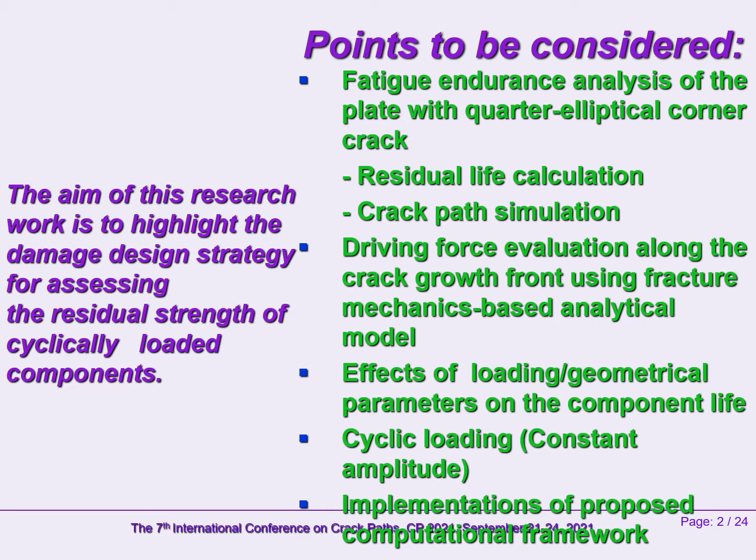The detrimental effects of microconcentrators caused by stress gradient in zones with initial flaws can be avoided during service operations if such safety-relevant mechanism is explored through suitable fracture mechanics concepts. Thus, the fatigue degradation analysis should be performed in terms of crack growth rate as a function of the stress intensity factor. The propagation of part-through corner crack is herein tackled through crack growth rates in depth and surface directions using two different fracture mechanics models.

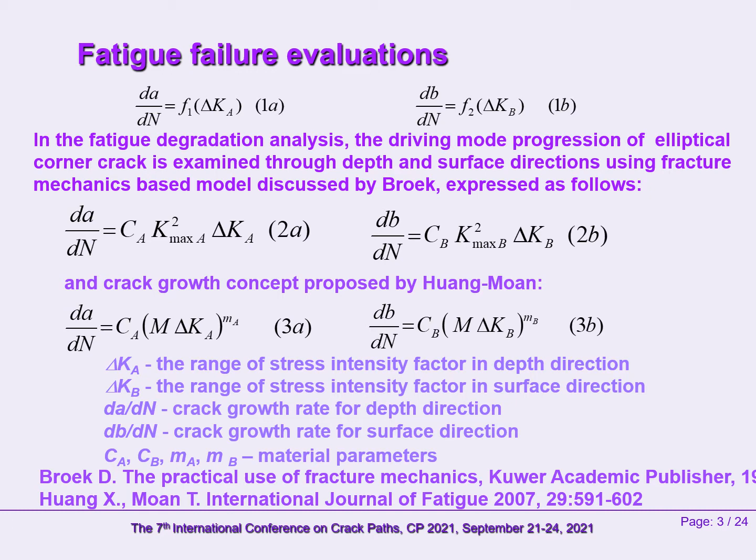The first is expressed by equations 2a and 2b, and the other given by equations 3a and 3b, where delta Ka and delta Kb are stress intensity factors in depth and surface directions. dA/dN and dB/dN are the crack growth rates for the two critical directions. Ca, Cb, mA, and mB are material parameters experimentally obtained.

Through the fatigue endurance design, the number of loading cycles to failure is evaluated by integrating the crack growth rate for relevant initial A0, B0 and final AF, BF crack lengths in depth and surface directions. In this context, the number of loading cycles expressed by equations 4a and 4b is obtained using equations 2a and 2b, whereas equations 5a and 5b are obtained after integrating equations 3a and 3b.

Bearing capacity of structural components with damage may often be threatened due to a complex interaction between surface loadings and environment. Such an effect is evaluated through fracture mechanics parameter M given by equation 6, which was involved in the Huang-Moan concept.

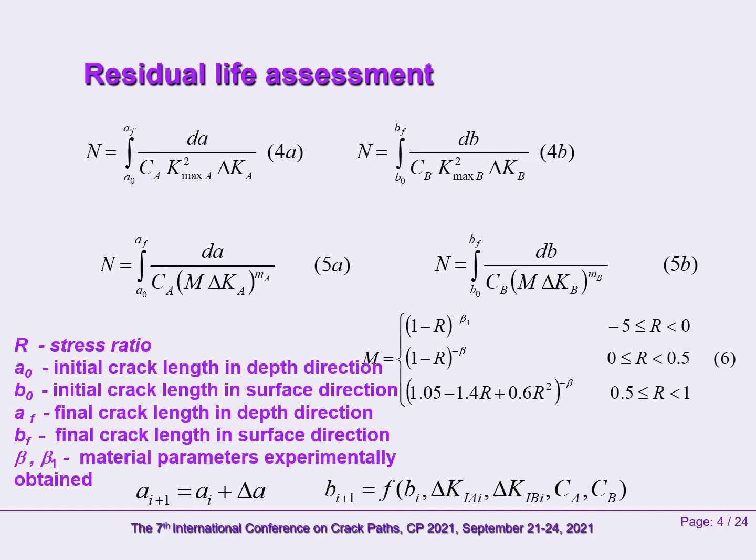A complex singular stress state field is responsible for the occurrence of fracture due to accumulation of damage in the vicinity of the crack tip. From a fracture mechanics point of view, such a driving mode zone should be considered either in terms of stresses or displacements, expressed by equations 1a to 1c and equations 2a and 2b, where stresses and displacements are tackled as relevant functions of the stress intensity factor.

The quantification of disturbed stress field in safety critical zones in terms of system durability requires tackling the effects of stress raisers associated with service loadings via the stress intensity factor using analytical and/or numerical fracture mechanics models. In general, the stress intensity factor in the case of elliptical crack can be evaluated for depth and surface directions using equations 7 and 8, where delta S is the applied stress range, A represents crack length, and FCOR-A and FCOR-B are relevant corrective functions related to the shape of the elliptical crack.

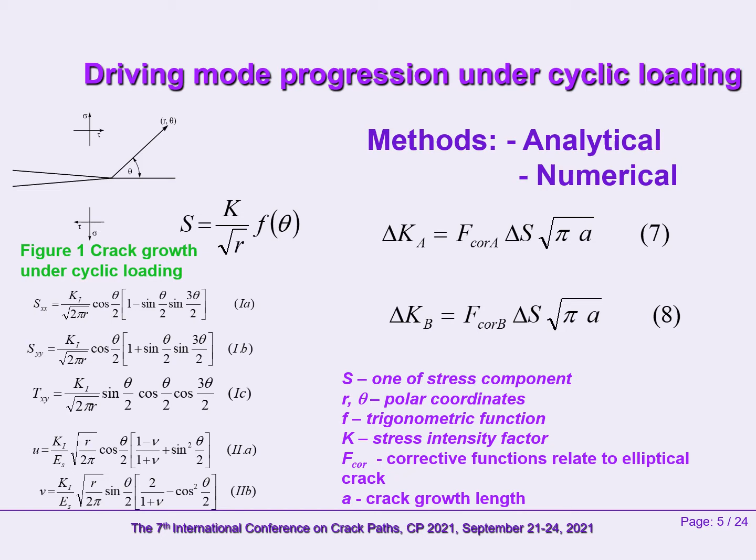According to fracture mechanics, the fatigue behavior of quarter-elliptical corner crack is explored employing equation 9, where delta S and A are applied stress range and crack length, delta K is the stress intensity range, and Q represents the ellipse shape factor. Crack shape variations under cyclic loading are theoretically analyzed using the corrective factor FQEC.

Expressed by equation 10, failure mode due to quarter-elliptical crack is evaluated combining the effects of crack size, crack shape, front face, and thickness of the plate through relevant corrective factors M1, M2, M3, g1, g2, f phi, and fw, shown after equation 10.

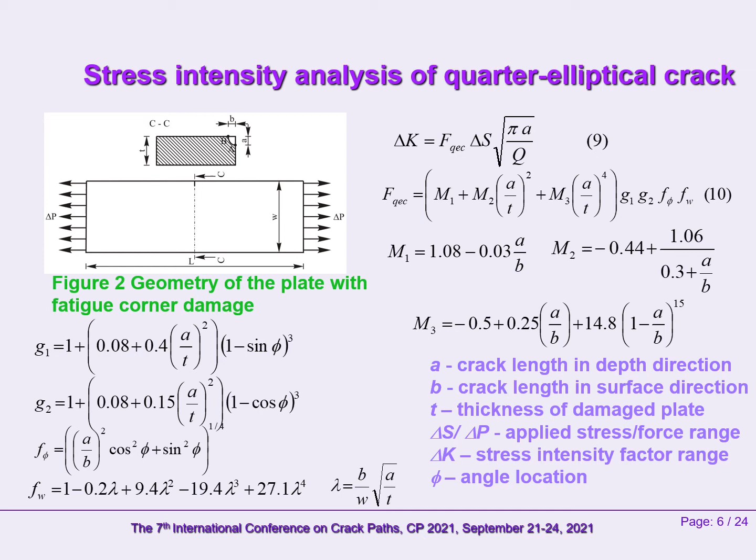The fracture mechanics-based computational framework generated within this research work is presented in figure 3. For the failure evaluations of plate type configurations, geometrical and loading parameters associated with material properties are used to explore the stress intensities along the crack front under cyclic loading.

Then, by employing two-parameter driving force concepts, the crack growth rate is generated. Further, the residual strength was assessed in terms of number of loading cycles. Moreover, driving mode progression was analyzed through crack path evaluations.

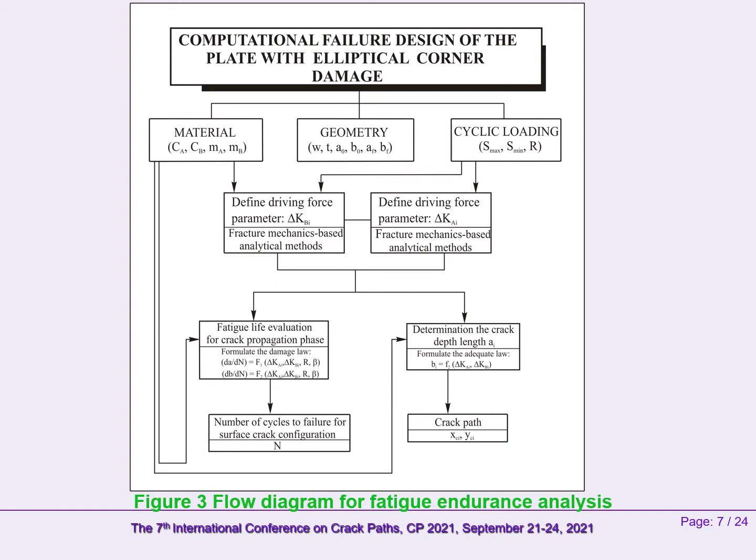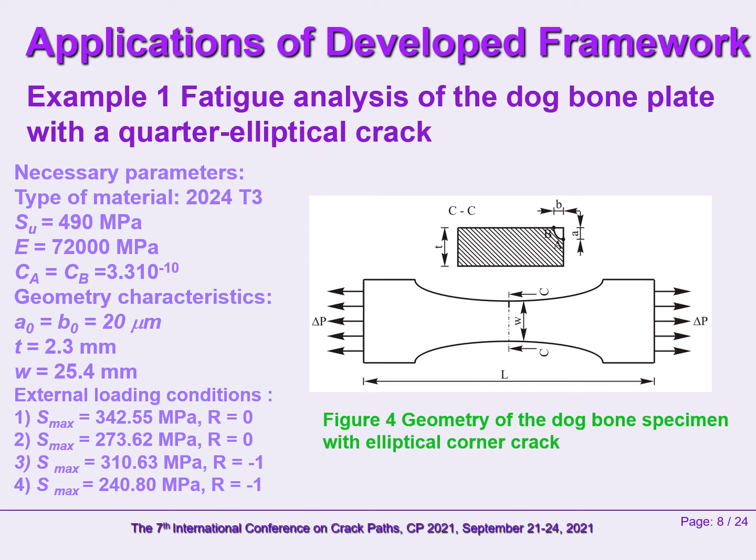Fatigue-induced plate failure is assessed combining equations 4a and 4b with the set of relationships for the stress intensity factors, equations 9 and 10, associated with relevant parameters M1, M2, M3, G1, G2, Fp. Since the residual life for the same configuration was previously evaluated by the present authors in reference 2 through the crack growth concept given by equations 3a and 3b, these are also involved.

Now, in the case of maximum stress equal to 273 megapascals and R equal to 0, the evaluated number of loading cycles as a function of crack length in depth and surface directions are shown in table 1 and figures 6a, 6c and 6b, 6d, where estimates in figures 6a and 6b are from reference 2, and those plotted in figures 6c and 6d are the present results.

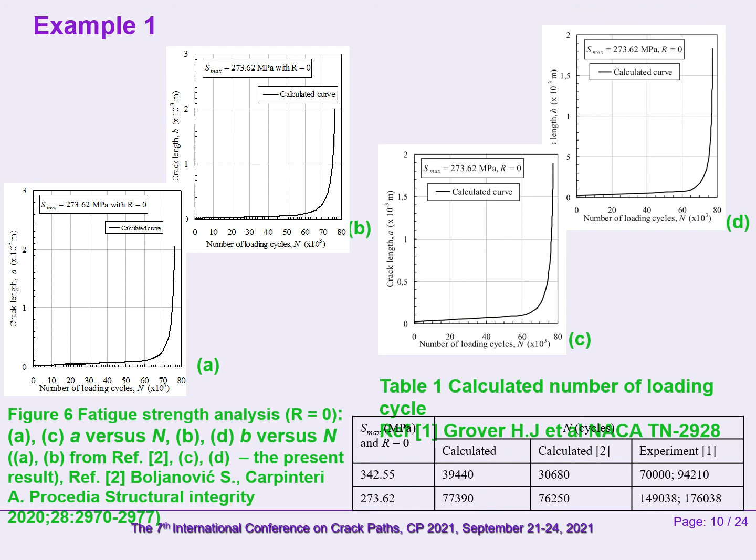From the comparison shown in table 1, it can be concluded that fatigue estimates obtained through the computational framework developed in reference 2 are more conservative with respect to experimental data from reference 1 than those generated through the framework proposed in the present research, in the case of stress ratio equal to 0.

Through damage tolerance-based analysis, the residual life was assessed in the case of cyclic loading with stress ratio equal to -1. Fatigue outcomes for maximum stress equal to 310 megapascals are shown in figure 7.

Estimates plotted in figures 7a and 7b are from reference 2, and those shown in figures 7c and 7d are the present results.

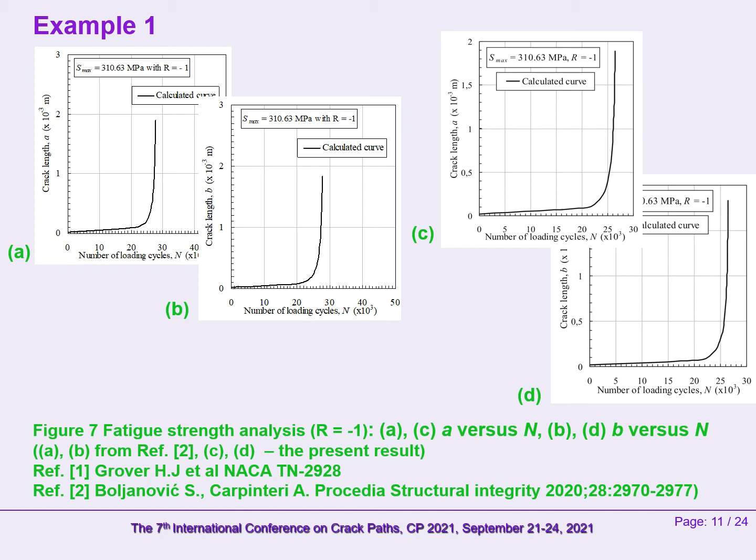Now, evaluated residual life under cyclic loading with stress ratio equal to -1 is compared with the experimental data reported in reference 1, as shown in table 2.

Moreover, the number of loading cycles as a function of crack length in depth and surface directions are plotted in figures 8a, 8b and figures 8c, 8d, where estimates shown in figures 8a and 8b are from reference 2, and those in figures 8c and 8d are the present results.

From figure 8 and table 2, it can be concluded that fatigue estimates obtained from the present research work are more conservative with respect to experimental data from reference 1 than theoretical outcomes generated in reference 2.

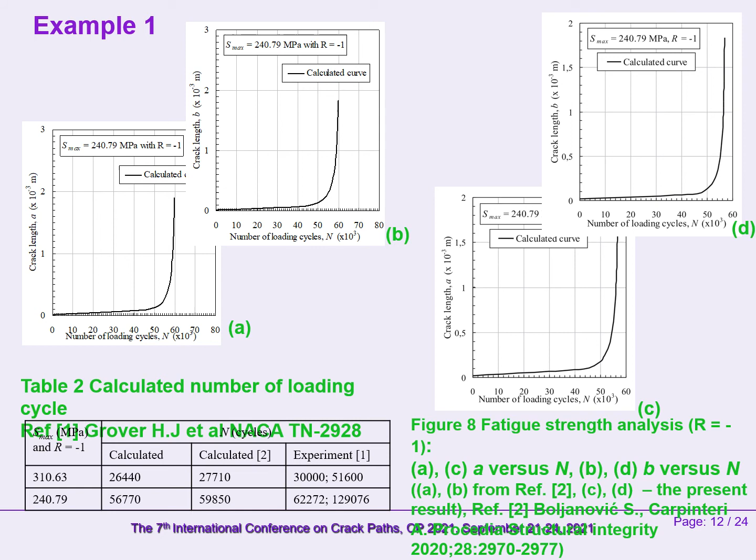Through the fatigue evaluations presented for the plate with elliptical corner crack, figure 9, the effects of stress ratio and thickness are analyzed under cyclic loading. Relevant geometrical, loading, and material parameters are shown on the left side of this slide for plates subjected to 3 different stress ratios and plates with 3 different thicknesses.

All plates are made of aluminum alloy 2024 T3.

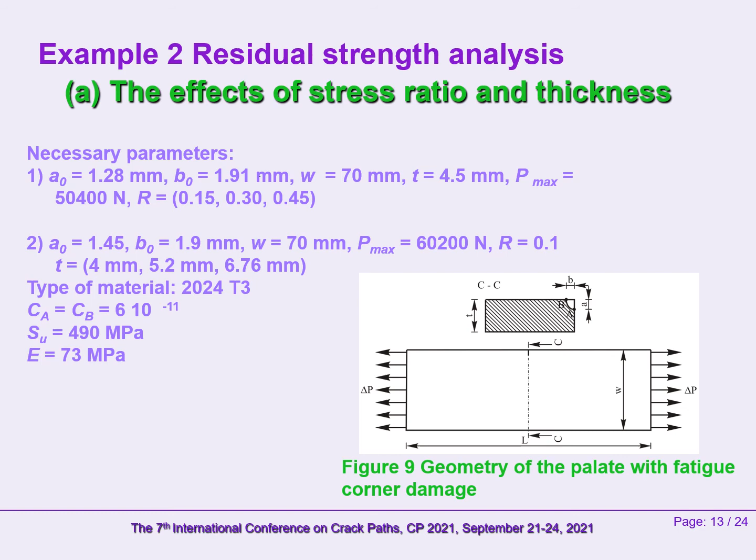The evaluated number of loading cycles as a function of crack length in depth and surface directions for 3 different values of stress ratio are shown in figures 10a and 10b. Further, fatigue estimates obtained for 3 different thicknesses are plotted in figures 10c and 10d with respect to crack length in depth and surface directions. Relevant comparisons shown in figure 10 indicate that stress ratio and plate thickness may have significant impact on the residual strength of plate type configurations with elliptical crack.

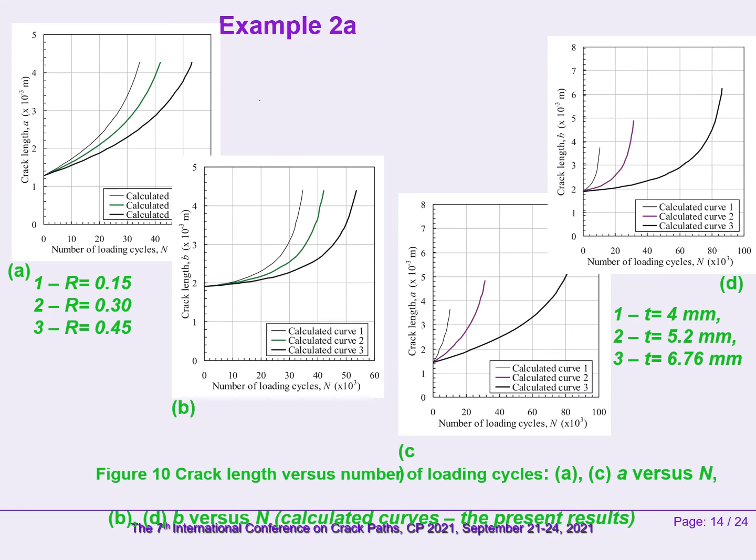Through the driving mode analysis under cyclic loading, the effect of applied stress is explored. By adopting geometrical, loading parameters and material properties shown on the left side of this slide, the residual life was assessed in the case of 3 different values of maximum stress, using equations 4a and 4b and equations 9 and 10 coupled with relevant stress intensity parameters M1, M2, M3, G1, G2, F3.

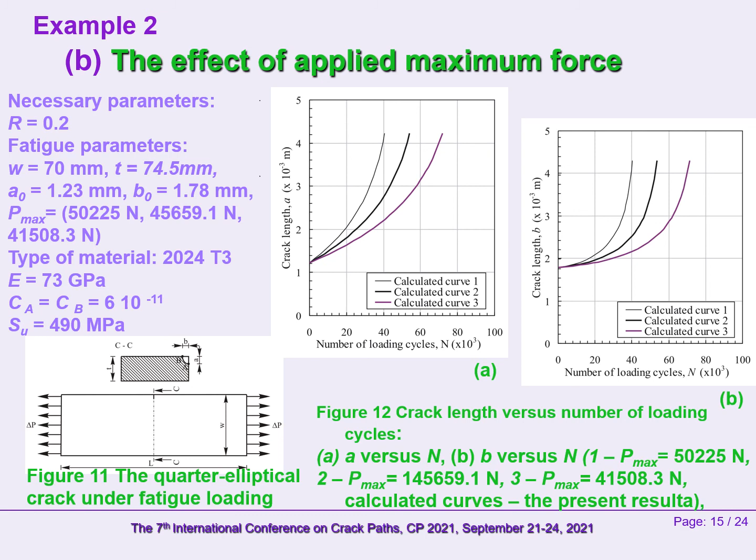Evaluated number of loading cycles as a function of crack length is shown in figure 12, where figure 12a represents life versus crack length in depth direction and figure 12b shows life versus crack length in surface direction.

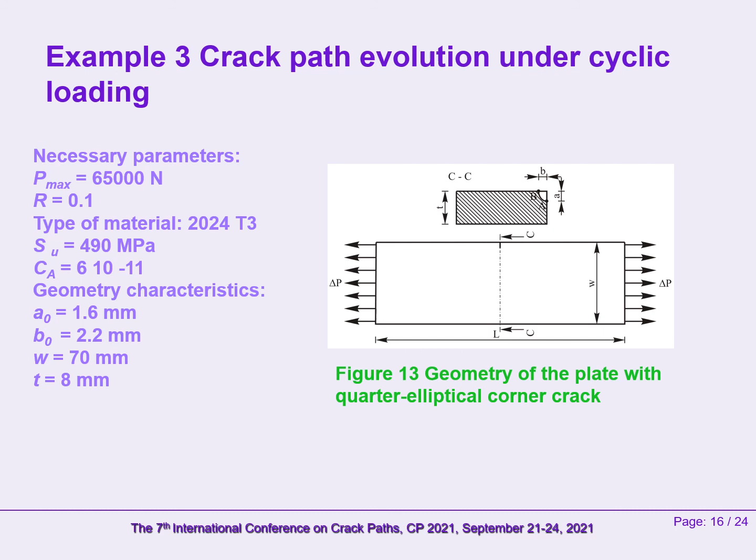Damage tolerance-based fatigue design presented here involves crack path analysis by employing equations 2a and 2b and equations 9 and 10, associated with relevant stress intensity parameters.

Evaluated crack paths are shown in figures 14a and 14b for 8 different crack lengths in depth direction, where vertical and horizontal axes match the front face and left edge of the plate, and the initial crack is characterized by A0 equal to 1.6 mm and B0 equal to 2.2 mm with respect to depth and surface crack growth directions.

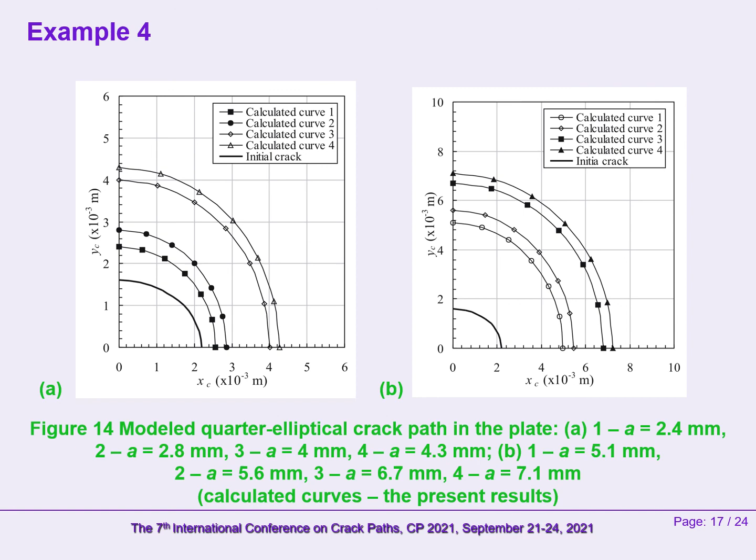Demands to assess the durability performance of modern large moving systems are raised to avoid sudden losses of their resources due to detrimental effects of manufacturing and environmental flaws under service loadings.

Therefore, this research work proposes a damage tolerance-based framework to analyze the severity of such crack-like stress raisers by taking into account the effect of stress ratio.

Novel expressions, successfully experimentally verified, generate the changes in the fatigue response, providing correlation of the stress intensity variations as well as the residual life with respect to crack length in depth and surface directions.

An important benefit of the analytical framework presented is that it can assess the failure strength under cyclic loading simultaneously through residual life of the component and crack growth path.